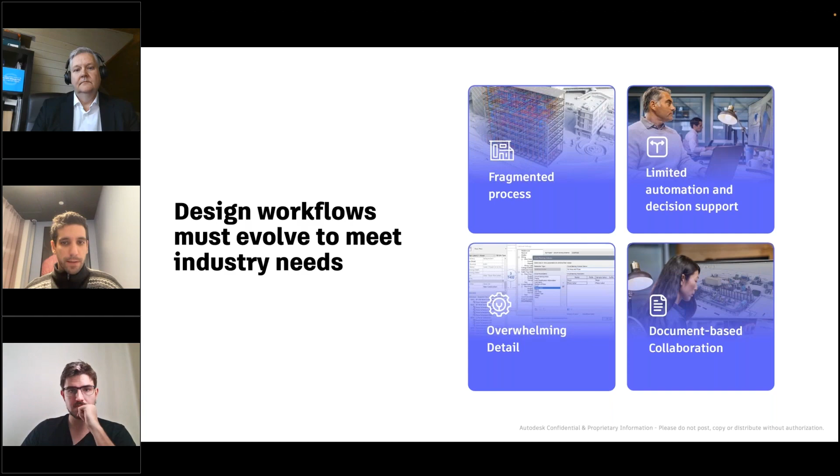And when we go deep and we use tools like Revit, sometimes we have an overwhelming level of detail that does not allow us to see the big picture. And we do believe there is an opportunity here to disrupt the way we work, and we can do that in the cloud. So Forma, Autodesk Forma, is the new AECO. By the way, the O, if you don't know, is about operations, industry cloud.

And the idea is really that we would allow people that work in the industry to work from planning to operations and across multiple verticals: buildings, transportation, industrial, and water. But this is a multi-year journey, right? Just imagine having all of these in the cloud. It will take some time for us to enable others to help us in that journey, but also for us to create that kind of capability.

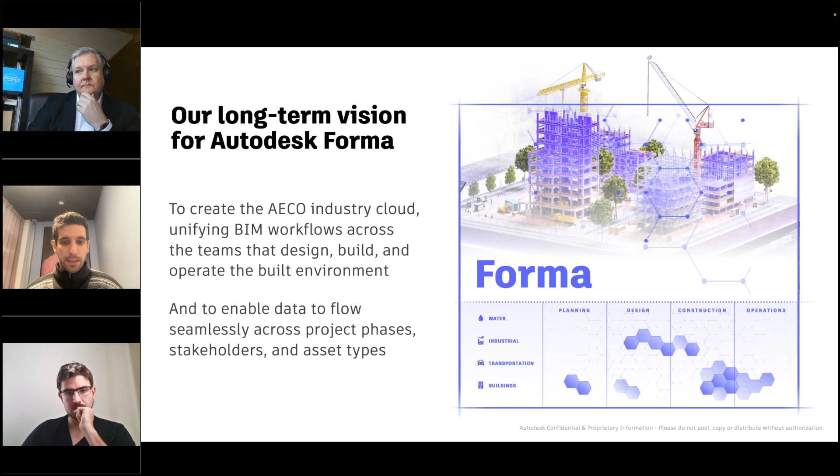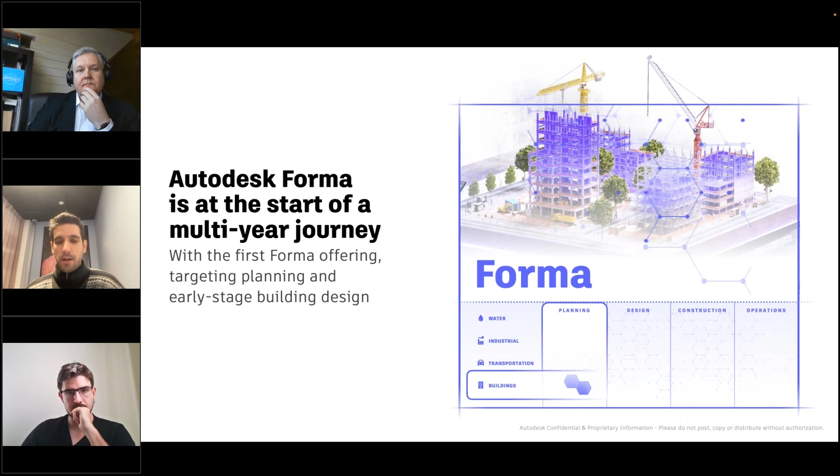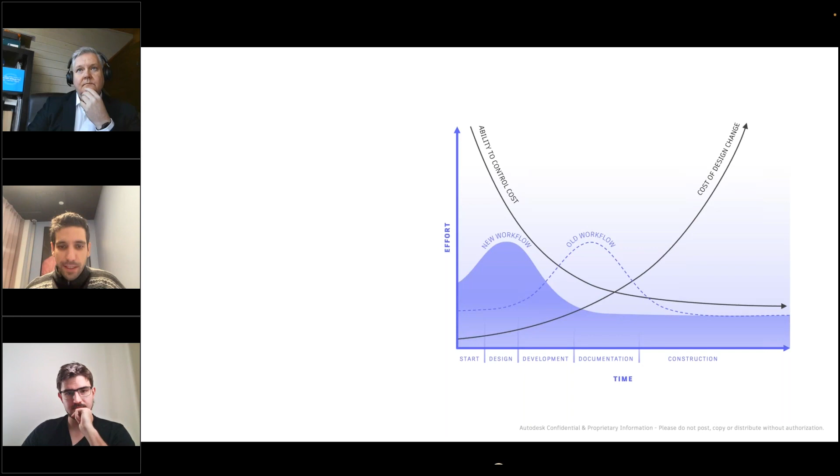So we needed to start in a place, and we have decided that planning and buildings is the right place, the sweet spot to start, because it's where we can create the most value. I think you all have seen this graph before. We really love it. You basically have two axes, right? Here it's about the effort, but also the ability to change things. And here you have the timeline.

So in the beginning is really where you can change so much. You can really create the whole framework, define the value. Everything is possible. But as you go through the project, you become much more limited in terms of changes, and the cost of those changes goes up and up and up. And again, the sweet spot where we want to operate and bring this platform to life is here between the start and the development phase. And that's really where we are thriving.

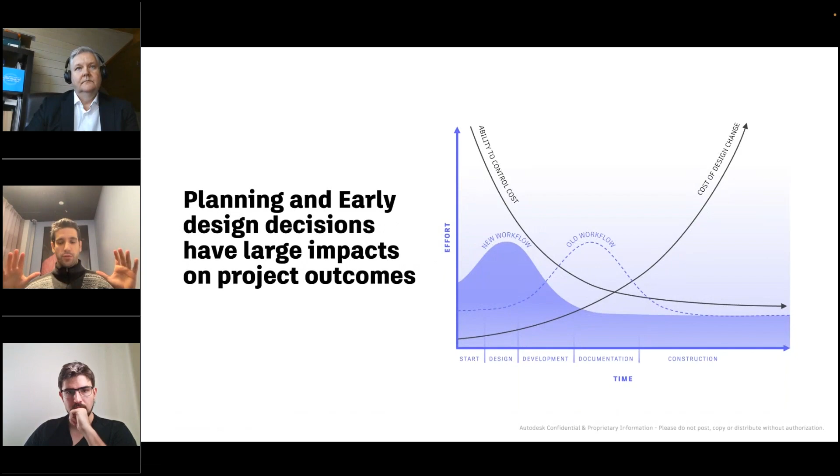It would be really cool to actually see the product in action, so you have a much better sense of our capabilities. And I have a little video for you. This is a very, very short video, but the whole idea is that you understand the capabilities that you can already find in Forma today, because this is a multi-year vision, and we can get very excited about it. But what I want to make very clear is that you can leverage this technology today.

We went live in May, and since May we have done more than 100 updates, because being a cloud solution, you only have one version. Everyone is on the latest, and we are pushing this all the time, right? Every week we are doing more than 3 updates, and we learn very quickly from everyone that is using it. And now I will share this demo.

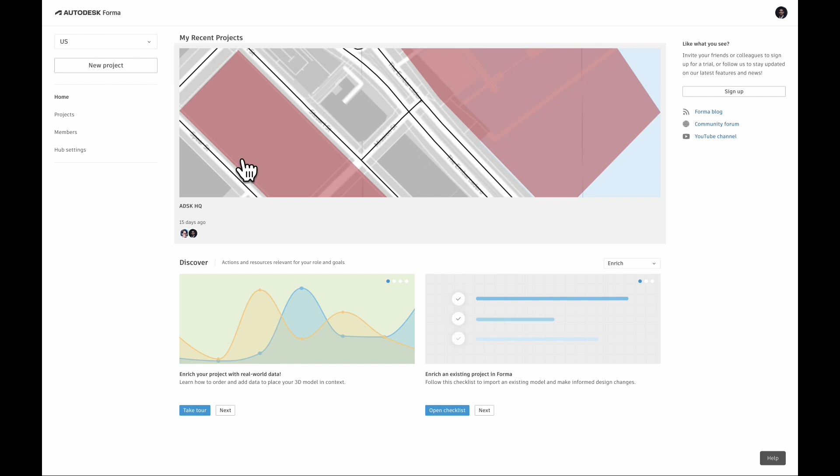Being a cloud solution means that there is only one source of truth. You can collaborate with all your colleagues, no matter where they are. And we are trying to break silos, bring as many stakeholders as possible to one platform so we can have informed discussions.

And everything starts with creating a project with contextual data. So you would just click new project, you go to a service that looks very much like Google Maps, you write the plot address. Today we are going to Brazil. I'm really cold here in Norway, so let's get a bit warm. And Forma will immediately zoom in to the right area.

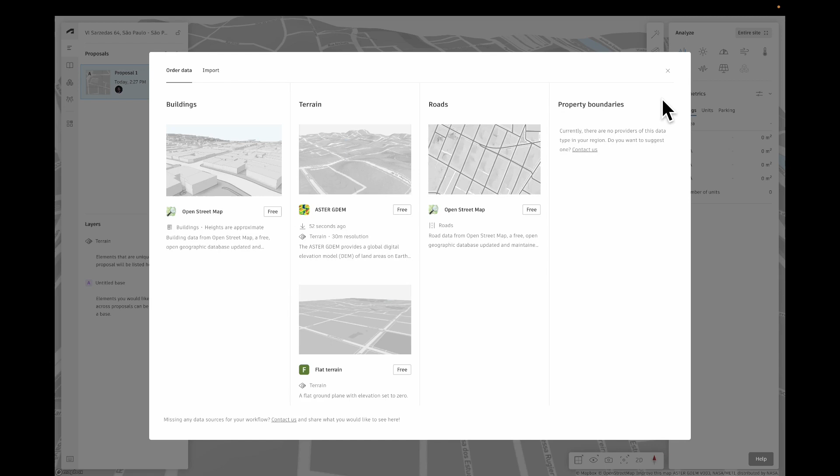And then our service will connect with all the data providers that you need in order to create this 3D world. And in Brazil, we don't have many data providers, but we have always OpenStreetMap for buildings, also for roads. Terrain, we are also fetching it automatically, but these data providers will vary a lot from country to country, as well with the quality. And Krzysztof maybe will touch upon it a bit later on. All that data will show automatically on the left-hand side.

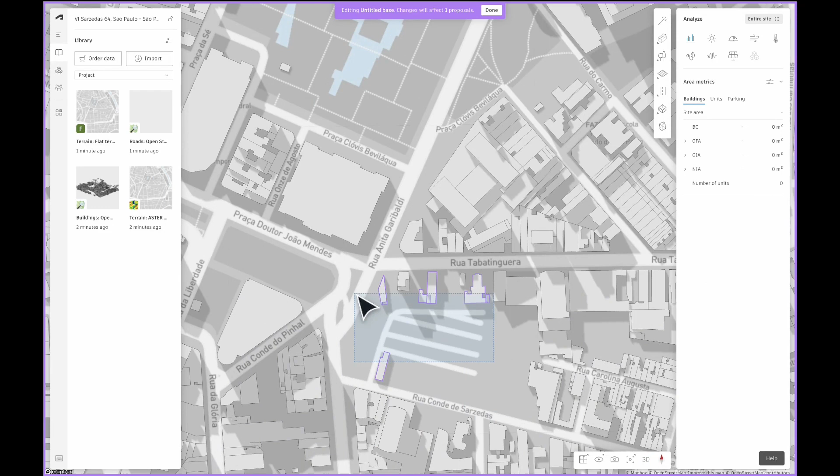And the cool thing here is that within a few minutes, you have a complete 3D scene of the world. So something that for me as an architect would take me maybe 2 days to create, we can do within just minutes in Autodesk Forma. I just removed the existing buildings that I want to demolish, and now I will define the site limit according to my project brief.

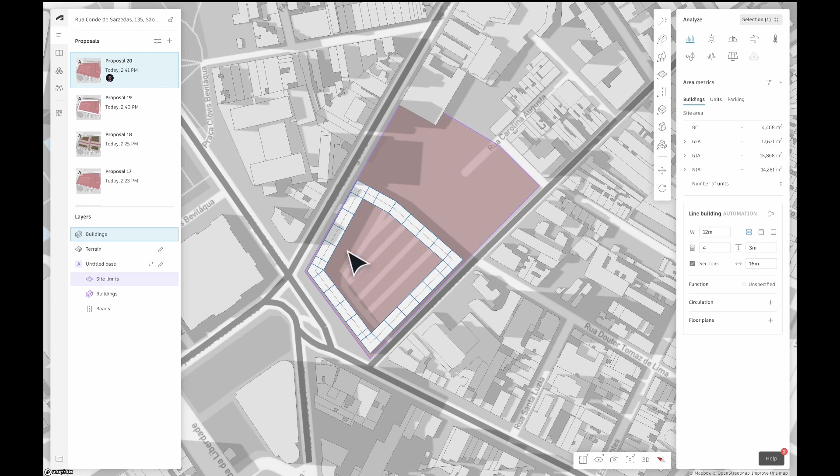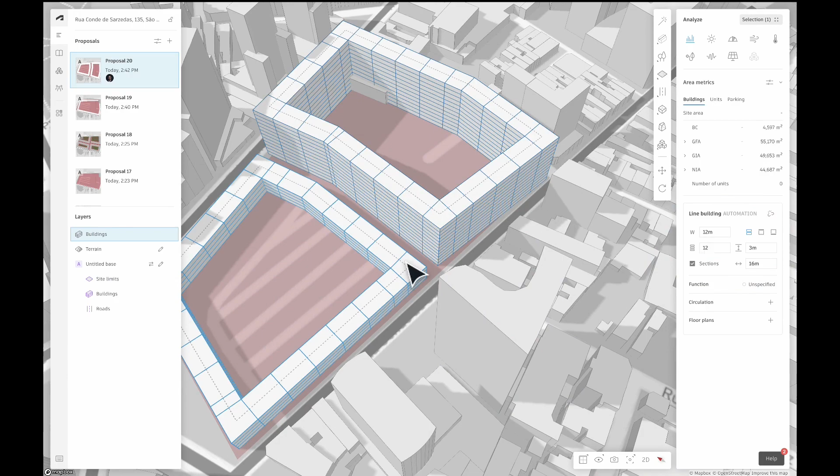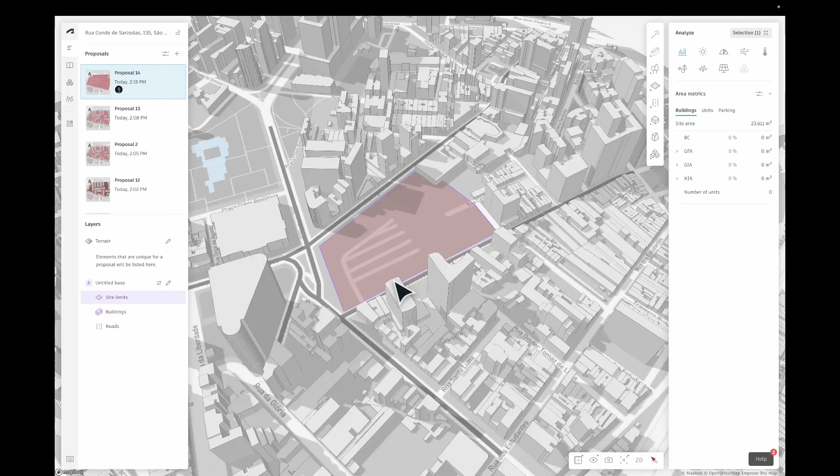So right now what I will do is push these to 12 stories. This one will be 8. And we will immediately see how many square meters we have on this proposal. So as we work, Autodesk Forma tells us how is this building performing? What are the areas we have here?

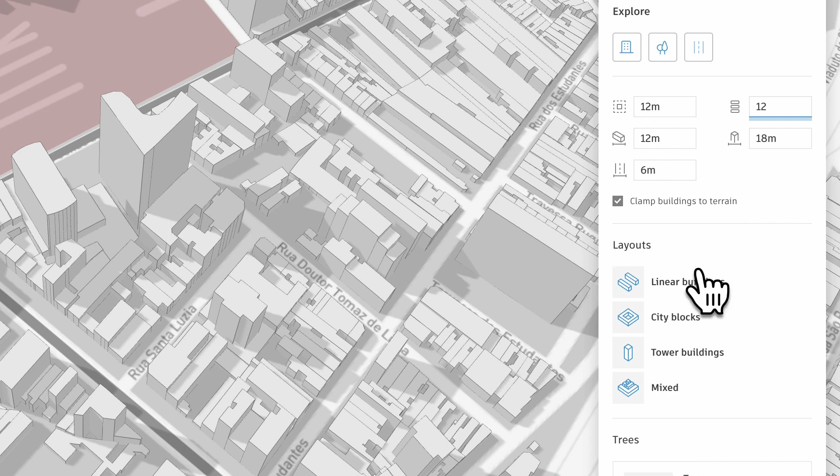We also have a little bit of generative design. And the whole idea again is to go wide, is to explore the solution room. And it's again very parametric. You define how many stories you want to have, the urban layout types. You type the plot you want to generate, and you will get multiple solutions here.

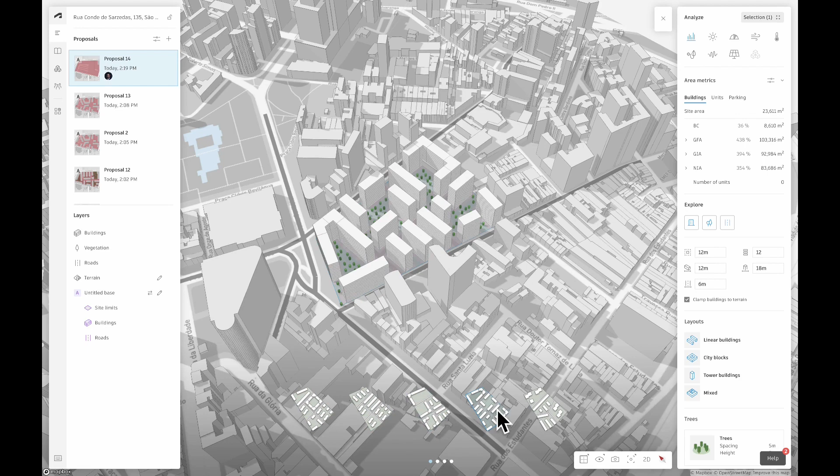And the idea again is not being like a golden standard answer. I mean, we still need architects to drive these, but we want to inspire people. We want our designers to hit the floor running and have fun in that process. And it's not really just about the design, it's about the performance of those designs. That's really what Autodesk Forma brings to the table.

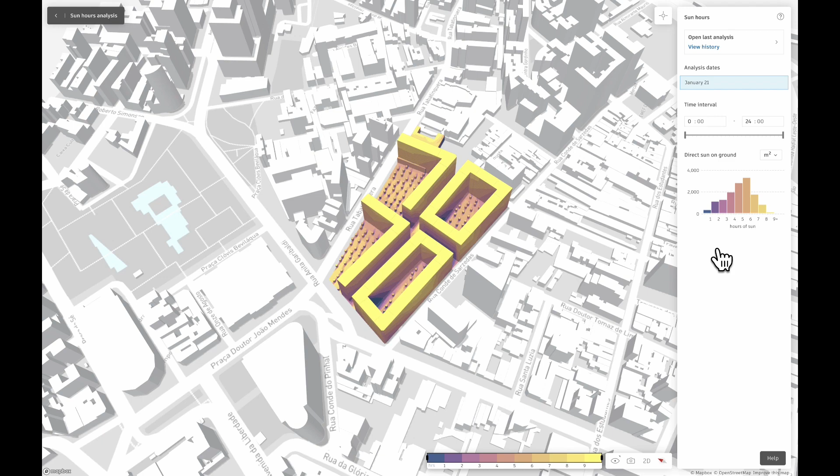We have multiple environmental analyses. Right now, I'm showing you sun. And what you see here is a computation of each pixel on a given day of the year in terms of sun hours. So it's not just a shadow study, it's really like a full calculation of each pixel.

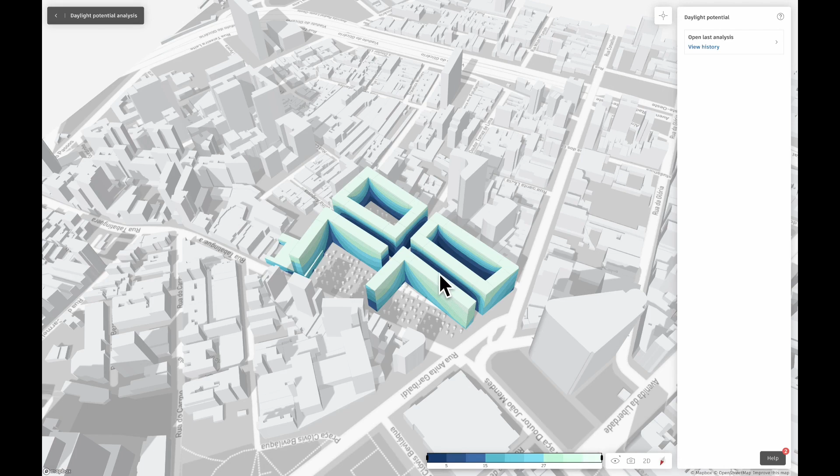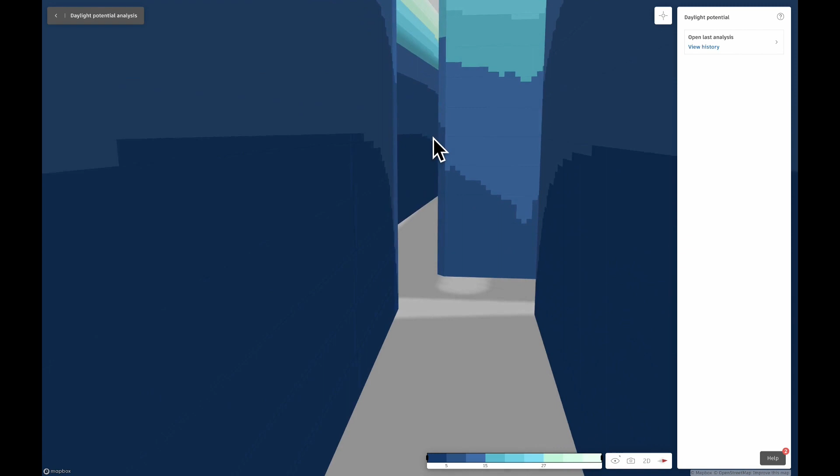We also have daylight potential. 3 color gradings. Dark blue means that we are unlikely to meet the requirements. So you see a lot of dark blue areas. We immediately see that if we would go for this proposal, this would be an issue because the 3, 4 first floors are extremely dark, which will affect directly the health of people that would inhabit that place.

We also have wind simulations. There is a lot, right? But for example, this one was something that architects loved from the first day, although they were not doing wind simulations from day one. But they were asking, we need that in the roof as well, because we want to have roof terraces. This is something that we have learned from you, and we have now in the product.

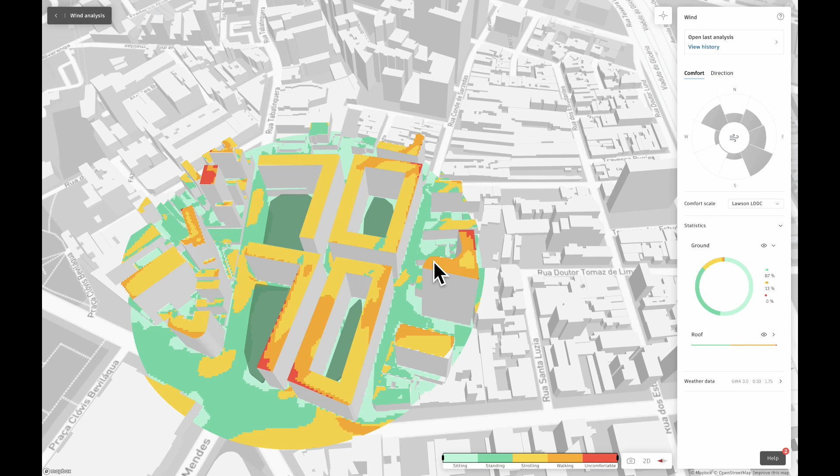And now you are looking at a comfort scale, very easy to understand. Light green means that it's very comfortable. Yellow, red means very uncomfortable, or even possibilities of a storm. And all of this happens in the cloud. For wind, it might take 2 hours, and we understood we need to make it even faster, right?

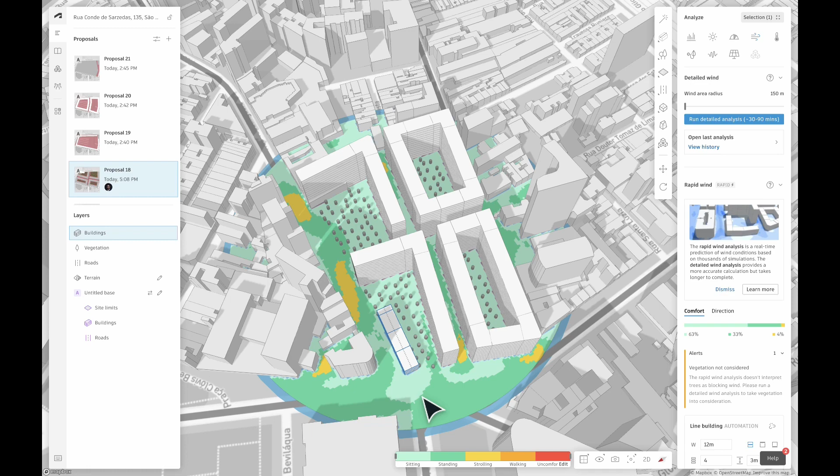So we developed surrogate models that are able to predict the results within seconds, so that you can iterate over and over again your designs, understand how you can optimize for performance, and then run a golden standard analysis, what I showed you earlier on. But this idea that you have AI helping you measure the performance of your designs at every instance of the design process is really transformational. That's what we are learning from the people that are using this tool.

One more tool, one more analysis. This is microclimate, extremely important for Brazil. We are looking at January, a really warm month, for a very common temperature, bulb temperature of 31 degrees. And we see that on the ground, we expect temperatures of 36 degrees. That's way too much. Even for Brazil, that's really, really warm, and that's a huge impact environmentally.

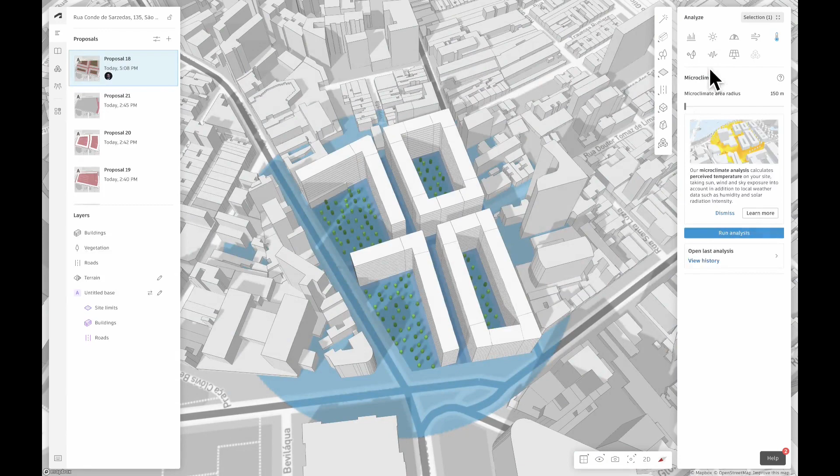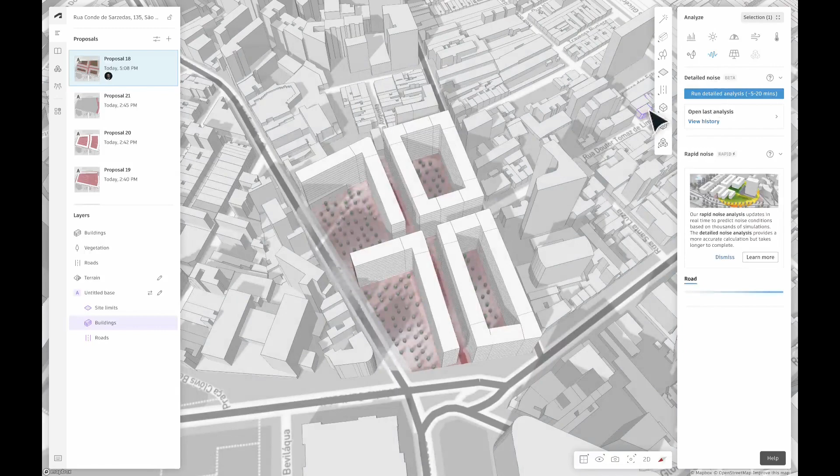I think this is the last one I'm showing, and it's solar panels. I'm no specialist in this area, but right now Forma gives me the opportunity to assess how many kilowatt hours I can generate from the roof. 80% coverage, 13% panel efficiency, and I immediately see what the potential is. So we learn a lot while we draw. This is part of the outcome-based design. We are very much focused on optimizing the performance of what we are doing, and the performance is actually what drives us in our iteration loops.

So I worked just 1 hour on this project, and I just tried to make something better than my first starting point. And you can see that the temperatures on the ground on the right-hand side are now 29 degrees. So we went quite significantly lower in terms of temperatures on the ground. And it's not because I'm a magician, it's just because I'm learning. And I understood that my first idea was not that good.

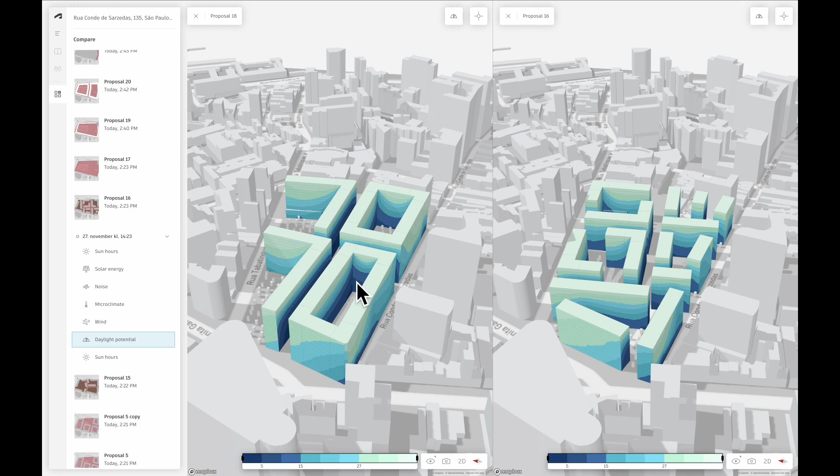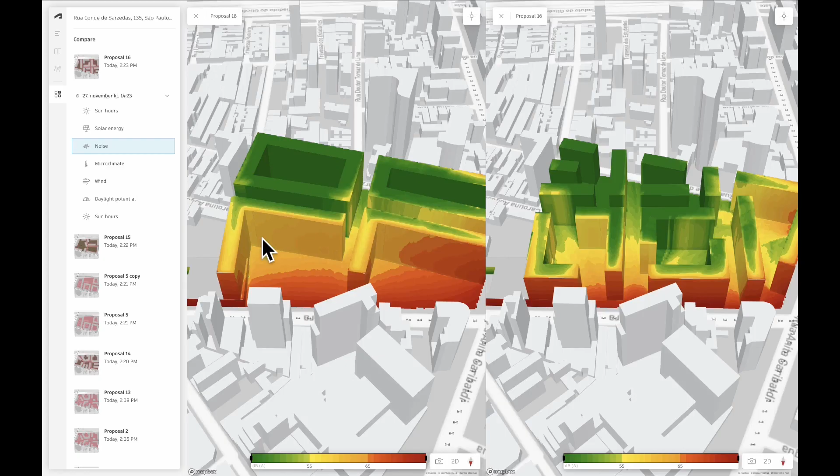In terms of daylight, we saw some issues. But what I understood is that if I start opening up these courtyards and allow light to come through the buildings, you can see on the right-hand side that it's not perfect, and it will never be in a very dense urban environment, but it got much, much better. And the same holds true for noise. If we use the buildings to protect that main area, we will filter the sound, and we see that within that red circle, we now have much less red. And I'm sure if I worked 1 or 2 extra hours on this project, I would be able to do a much better job.

So what I wanted to bring home is that we allow you to create a 3D model extremely quickly, explore a solution room within minutes. You have hundreds of different proposals, and then you can learn about the performance of those designs. These are the native capabilities of Autodesk Forma today, but we understood we want to do more, right? We cannot solve the whole workflow ourselves. So we want to take a step further, go beyond the Autodesk world, and that's what Krzysztof will be talking about. So I will pass the word over to you now.

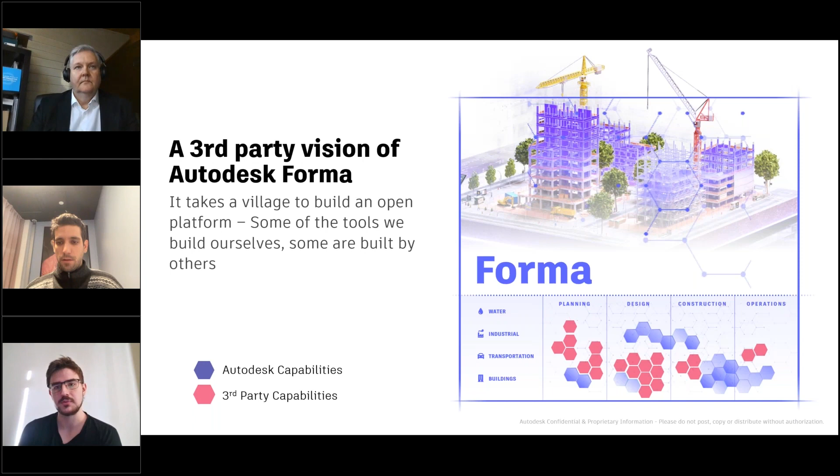But there are also many other solutions coming from end customers, from consultants, partners like Symetri, but also other software companies. So what we want to enable in the future is for Forma to become a platform, an ecosystem, which allows you to combine all of those capabilities together. And as mentioned, this vision is grand, since it spans from planning through design, construction, up to operation, lifting basically everything to the cloud.

And we are not there yet. Where we are, as we've started from the very tiny bit of this, which is building and planning, but we've already basically set up with a mission of doing what we want to do in the long term and demonstrate those capabilities on a smaller scale.

So what we did is we combined, on top of the Forma platform, capabilities you might be familiar with from SpaceMaker, a Norwegian startup that was acquired, and FormIt, basically web modeling tools. We put both of them on top of the platform to work together and demonstrate the value that Daniel was excellently explaining just a moment ago.

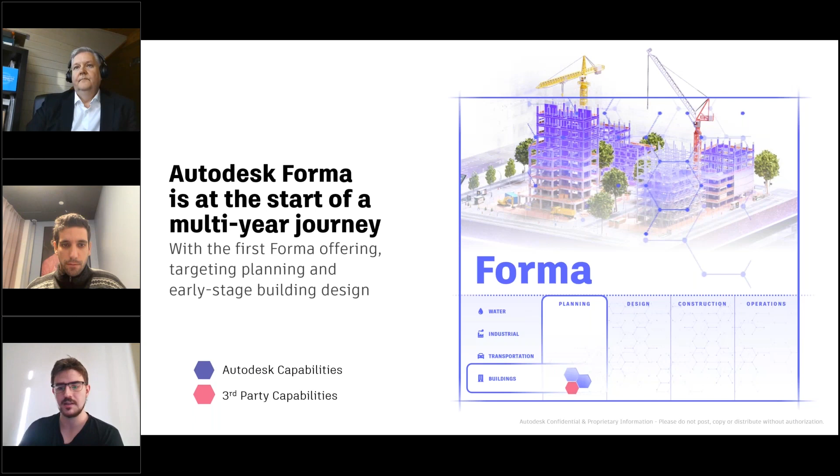But there was one more very important bit, which is that from the very get-go, we started with open APIs. We started with the vision of Forma being co-created by other people. So this is what was launched already in May, with third-party capabilities available to users within the interface.

So how I would summarize Daniel's value chain, what you've seen in the product, I would divide it into three pieces of what we offer natively today. We enable you to build a scene very quickly on the web, getting data sources such as buildings, roads, site limits, everything necessary for you to kickstart your project within a single minute.

Then we give you a set of tools, which Daniel was showing very well, for how to design the building very quickly, either as automations or manual design. And then we give you also a set of environmental analysis tools that are able to assess the value of what we've designed in the previous step.

And as mentioned, the magic of this works in iteration of being able to change something and get the results very, very quickly.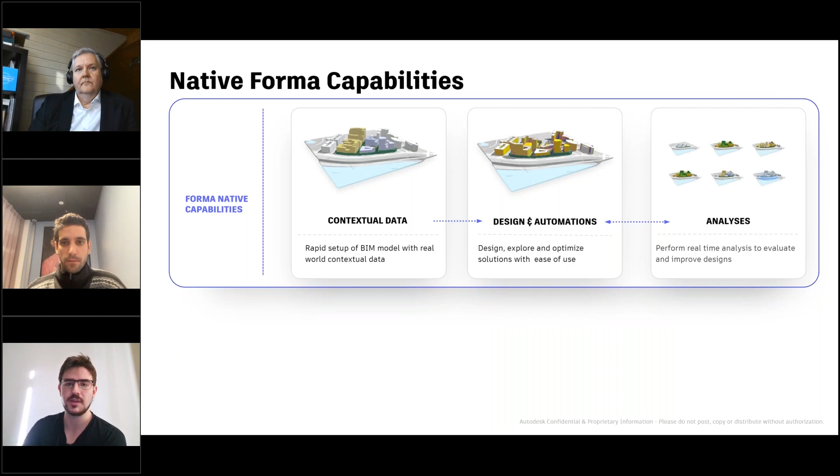Where the teams that I work with come into play is we don't do basically any of that. What we do is the underlying platform, and we open APIs for others to come and create this vision with us. We believe that this pie is definitely big enough for all of us to slice, to grow the pie instead of slicing it, and that's why we believe in others who can create this functionality with us.

So for each of those blocks, we already see companies coming in and contributing to the platform, reselling their functionality to others, but we also see end users building this functionality for themselves on top of the platform.

So we can see a data marketplace emerging with other people contributing contextual data to Forma. You're not reliant only on the sources that we connected, but you can get sources from other providers such as Plex Earth, Esri, Regrid, and many others.

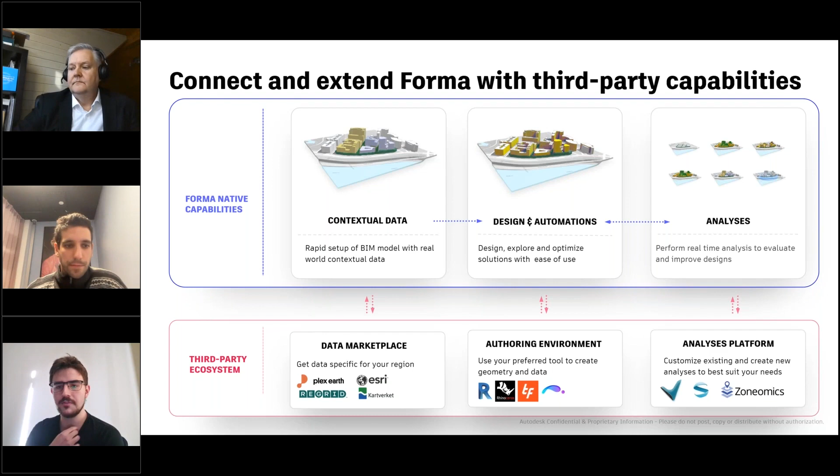We can see people building, and we are building more design and automation tools. As Autodesk, we are connecting existing tools from the Autodesk Suite to this cloud vision. We are also either connecting ourselves or having other people come in and build functionality for more authoring capabilities. Then finally, we do the same for analysis, so you're not only reliant on our analysis, but others can build those functionalities within the product itself.

So a couple of examples within this vision of those three steps. One really cool example that appeared just a week ago, basically out of nowhere for me, is what the company Plex Earth did within Forma, providing very high resolution imagery. The blurry image is the Google Maps you'd normally get, but the satellite images they put into Forma are extremely high quality, allowing for better design and evaluation at the very early stages of the design.

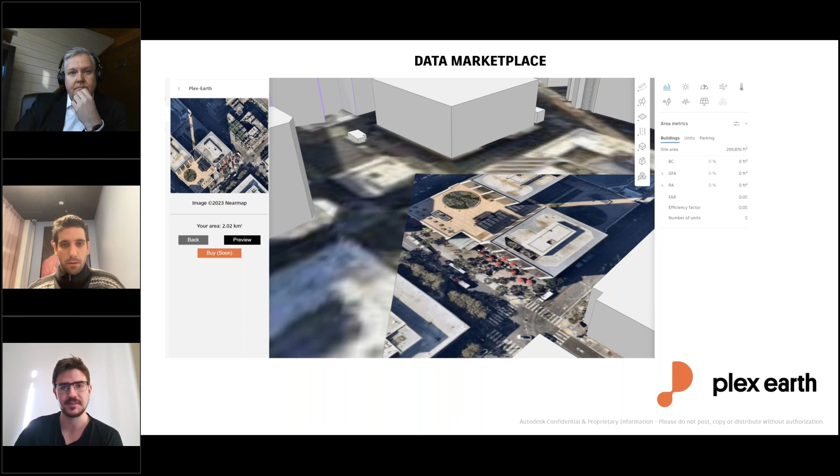What our friends at TestFit did is that straight out of the box, they provided us with their parking functionality, where you can very quickly automate the creation and calculation of parking spots within this Forma environment.

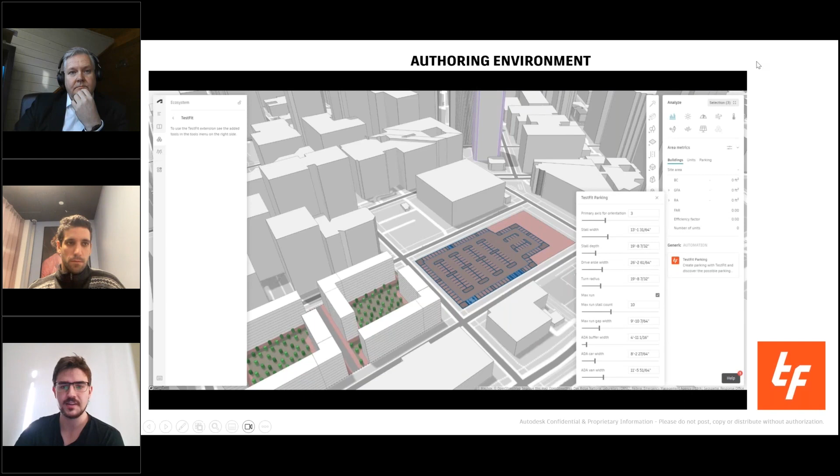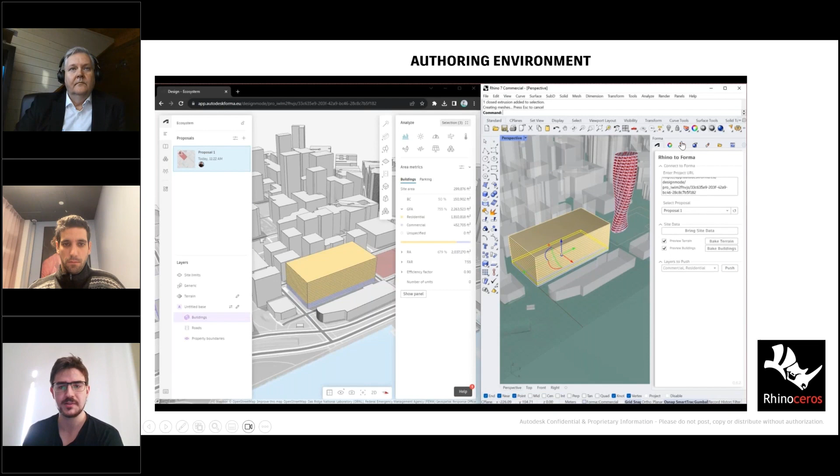We also have a Rhino integration working on a similar premise, because we don't want you to be only reliant on our tools. There are plenty of great tools already out there on the market that are great at designing and creating, and we want you to be able to model within those tools. So on the right you can see Rhino — we're modeling something, and it already pops into Forma as basically almost native buildings.

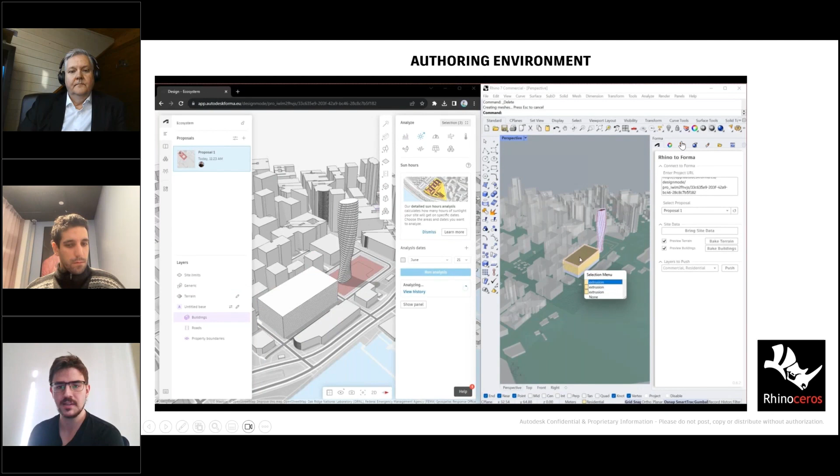So something that can be scheduled, something that you can assign a function to, something that you can calculate the areas with, while keeping your geometry completely in Rhino. This also allows, and the main purpose of this probably is not only to calculate the areas, but also get access to the various analysis that Daniel was highlighting.

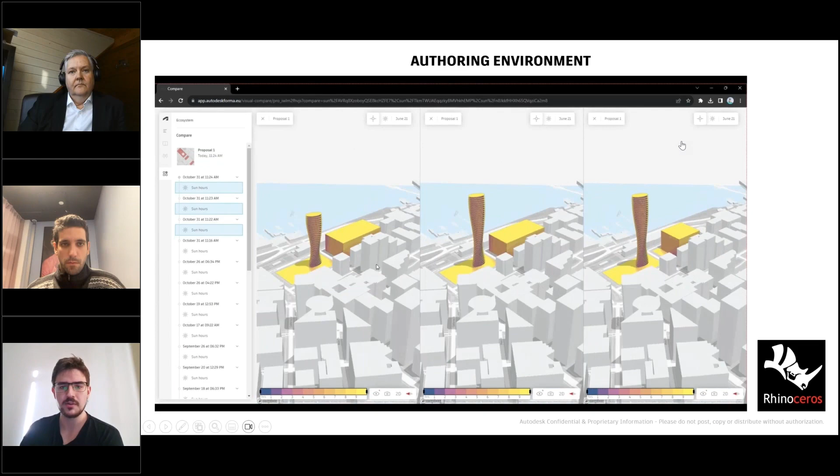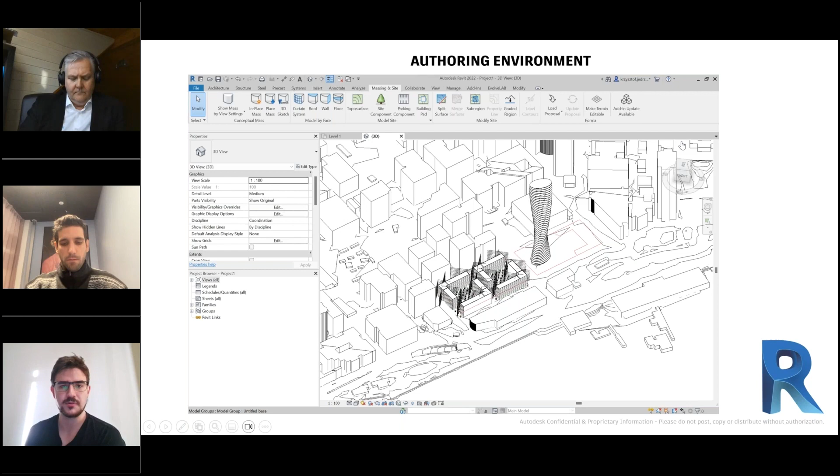In this example, we're basically editing and pushing different options into the Forma environment, so we can very easily compare them in this environment, while also being able to take it to Revit later on. This is our Revit connection, which allows for bringing the data into Revit, but also bringing the Revit data the other direction into this project that we've just brought into the Forma environment, if you wish to use Revit for your authoring or designing capabilities.

And then finally, one cool example that we also recently saw was Veras from Evolve Lab. That would be more on the analysis side, which allows you to basically generate AI images based on prompts using Stable Diffusion, to generate some very quick visual evaluation of what this project could potentially look like.

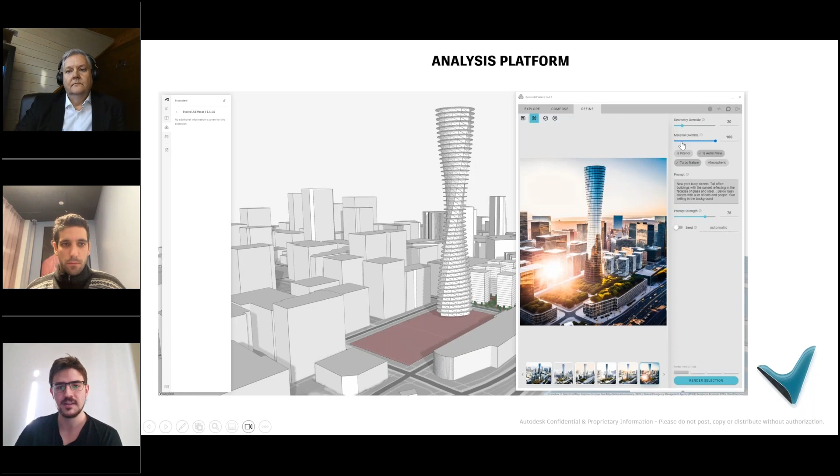And what is cool about all of this is none of the teams that I work with create the functionality themselves. What we do is basically work with open APIs to allow people to build in and create functionality on top of the platform. This vision would never be possible without the community, without customers, without third-party software companies that could be considered competition, but in Forma they are not, but also partners like Symetri. This vision wouldn't be possible without other people that are creating, and willing to commit and trust us on this vision. And I think one excellent example is what Symetri did.

And I think Jan Tore, you can show us a little bit more about how it went and what's actually coming there. Yeah, as Krzysztof was talking about, and also the presentation you saw from Daniel, they are very much relying on third parties engaging into the Forma platform on several levels, everything from conceptual design and so forth.

So we were approached by the Autodesk Forma extension team back in August this year. For those of you who have seen the previous version of Forma, SpaceMaker, they had an outdoor area analysis extension sitting on the SpaceMaker platform that was not brought into the Forma platform. It was deprecated now in October. And the Forma team asked us, could you take on that responsibility to bring that extension to the market for existing customers now on the Forma platform?

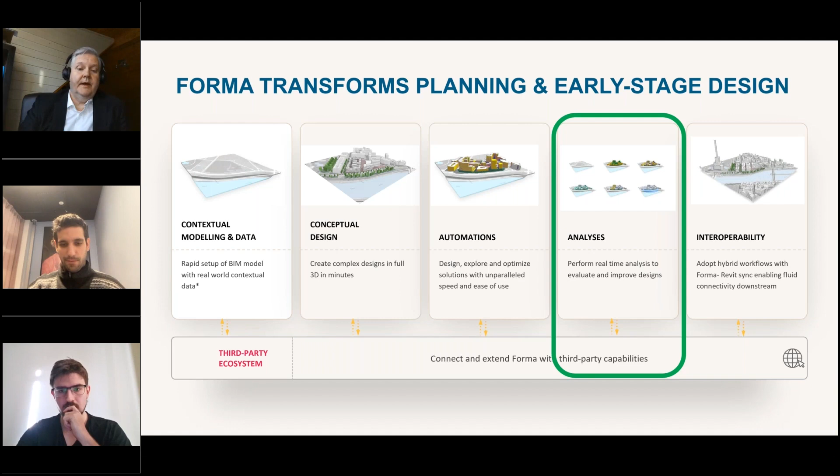So why do we need outdoor area analysis? Why do cities need this one? And it's all about ensuring the quality of life. Make sure that people love living there and work there as well.

When talking about outdoor spaces, there are several elements we need to consider. And that goes from everything from vegetation, the space that Daniel was talking about showing those sunlit analysis, how much sun is available on the site, and noise impacting. Do we have play areas for kids? And of course, how close is it to existing infrastructure and buildings?

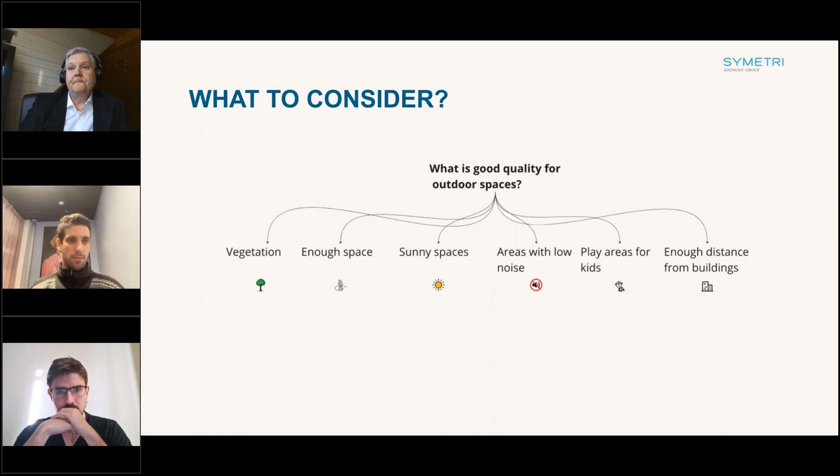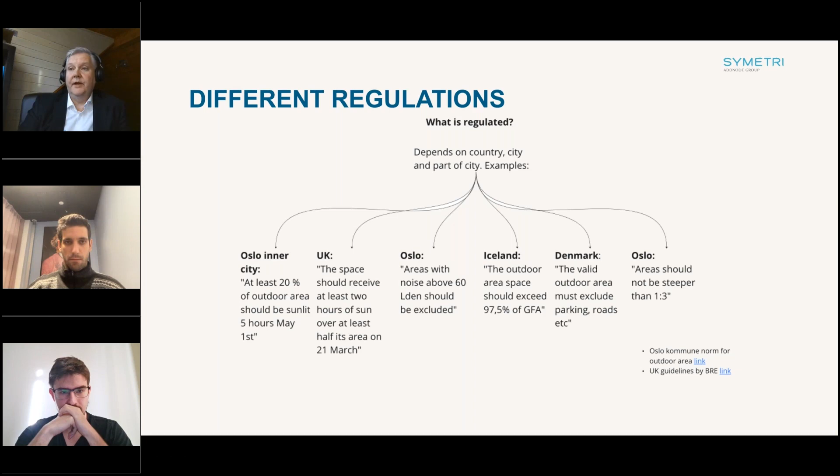So we sat down and looked at the Forma, or the extension that was on the SpaceMaker platform, and how can we bring that into the Forma platform. And as you see, different countries, different regulations, even different regulations within the same country and cities that we need to comply to and provide a solution for our customers to really make sure that they are within the regulations and the demands for the area they are planning to build on.

So in the first step, we are to cater for regulation requirements in Norway, but of course, in a later stage, the objective is also to provide the extension for the wider global market.

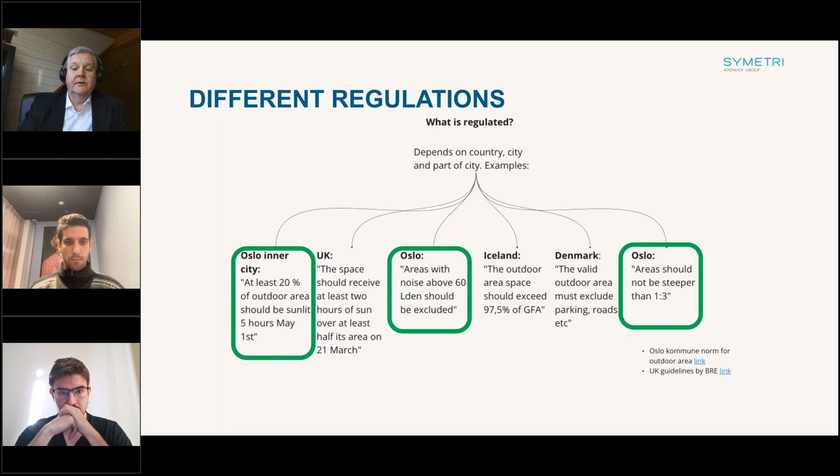What's next? We are currently finalizing our MVP, the minimal viable product, to be available for customers in the beginning of December. And I will say that if you are interested to test out the prototype being available now, provide feedback, voice your needs, you already now today have the possibility to go into the Symetri ideation portal. It's crucial for the team to get that type of input, so we make sure that we are shaping the tool's development in the right direction for your needs out there.